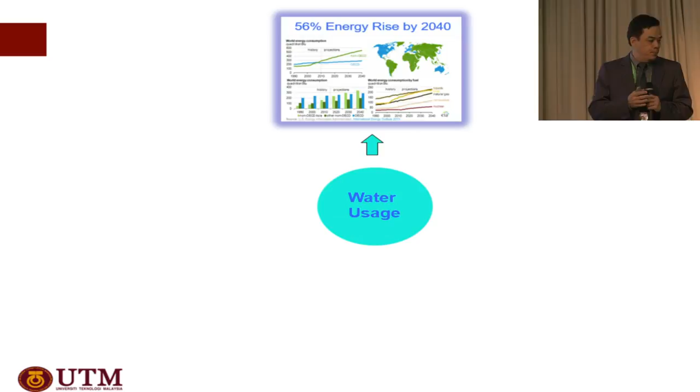Let's analyze water usage in a bit more detail. Water usage requires energy usage, as we know, and sometimes a significant amount of energy use. Let's try to analyze why water and energy are so closely related, from this water value chain that many of us are quite familiar with.

Water comes from water sources, is conveyed through a water treatment center, and then distributed to consumers. After that, it's treated as wastewater. Wastewater is treated after use in sewage treatment, and then discharged according to standards required by every country before water sources are generated again. So you will see that every stage in water utilization requires none other than energy.

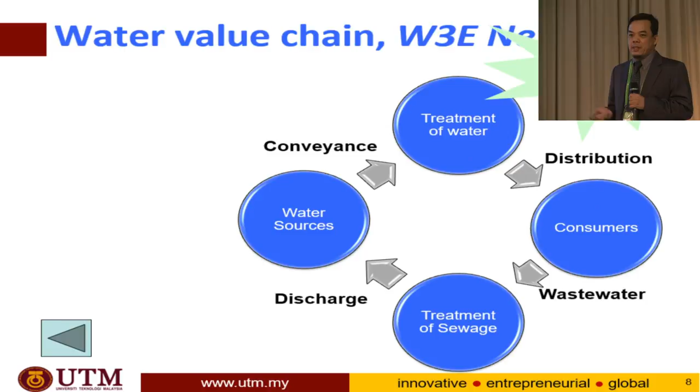Every stage requires none other than energy. It means that other than using water and paying for water, we also have to pay for energy throughout the value chain of water. So I call this the W3E nexus. What is W3E nexus?

W3E nexus means that water is closely linked to energy consumption, linked to environmental consumption, and also linked to economics, or linked to costs, because water requires energy and you pay for the energy cost throughout the value chain of water. You pay for the raw water bill itself, and you pay for the chemicals to treat the water, as well as capital costs for water. The bigger the usage of water, the more impact you have on the W3Es.

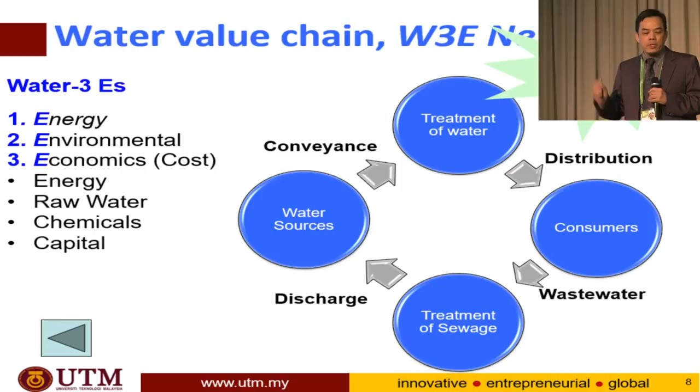Water, energy, environmental, and economics. So far, people have known that there is a close nexus between water and energy, but they have not put it in this form. Let's go back to the figure that I had before.

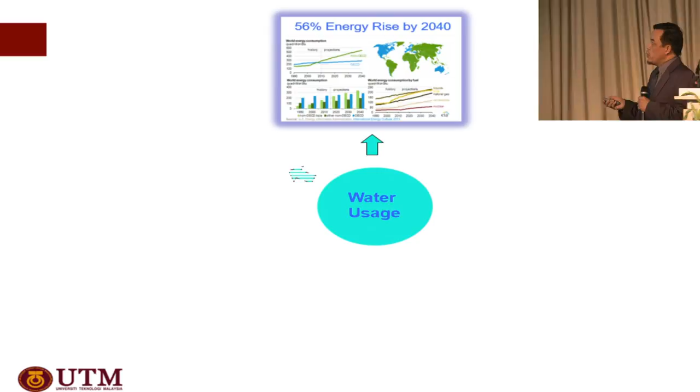So we know that water usage is closely linked to energy usage, and water usage is also closely linked to pollution, because as we use water, we tend to pollute, to varying degrees. We also pollute not just water, but also the environment, generating gaseous emissions.

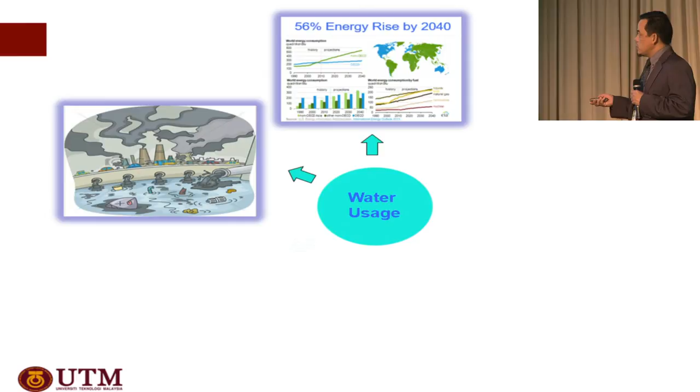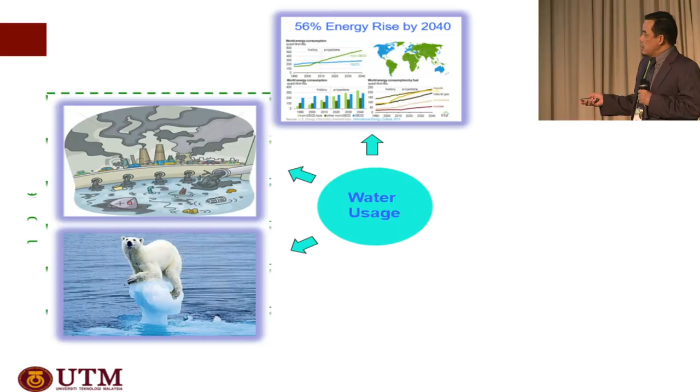Why? Because as you use energy, you also emit gaseous pollutants. And as I mentioned, water is also a cause of global warming and climate change, because we pollute water as well as the environment, generating gaseous pollutants. So this is the environment nexus.

And on top of that, we also know these are the causes of water shortage. All three nexuses are the causes of water shortage, because energy usage, on the other hand, requires a significant amount of water.

When we produce steam, we need water. When we produce renewable energy, we also need water for cooling, for example. So energy usage is a big contributor to water shortage. So does pollution, because when you pollute the environment, we also have less quality water. In the end, that nexus is actually reversible, typically.

There is also the link between water shortage and climate change. Recently in Malaysia we had a very big flood, which you may have caught in the news. Because of the flood, all the people affected had problems accessing quality water, and that caused water shortage. Even flood disaster linked to climate change caused water shortage, and you can be assured drought is also one problem of climate change that causes water shortage.

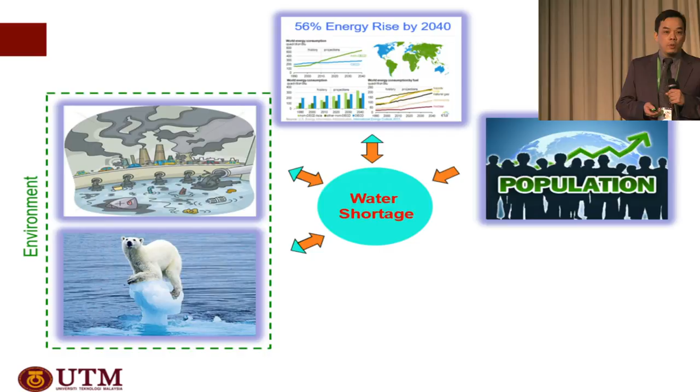What other things cause water shortage is actually what we already know: population increase, demand for water has increased over the years, and industry, including agriculture, may be the highest demander for water. In the end, all these contribute to a major economic risk in the world. The United Nations Environmental Program has estimated about 63% of all risks are associated with water.

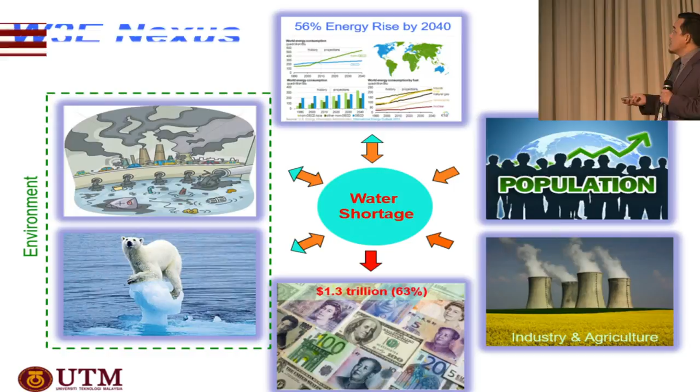That's why water is the biggest global risk, to answer the first shocking news. So that's what I call the W3E nexus. The last E is the economics nexus. This is a big risk, a major risk.

By 2030, it is estimated that because of water shortage, the world is projected to face a 40% global water deficit under the business-as-usual climate scenario. This was basically reported very recently, in 2015.

So the question is, what are we going to do here? We will be sharing some experiences of what we have been doing. You may share your experiences too, because ours is just one of many experiences people have had. This is the topic I'm going to talk about today: the W3E Nexus, achieving water sustainability through what I'd like to differentiate as piecemeal versus holistic strategy, the systems approach. I'll go through this quickly, as I don't think I have time to go through the details, but I need to share these things.

If time permits, I will share a video, about 2 minutes, of what we have done at UTM, for example, to raise awareness among students on water sustainability. Some take-home messages after that.

Back to the water value chain. We can divide the water value chain into two sides: one is the supply side, the other is the demand side. We also remember we have 3 E's to worry about: water, energy, environment, and economics. When we propose solutions, it's better that we subject every solution to this W3E nexus.

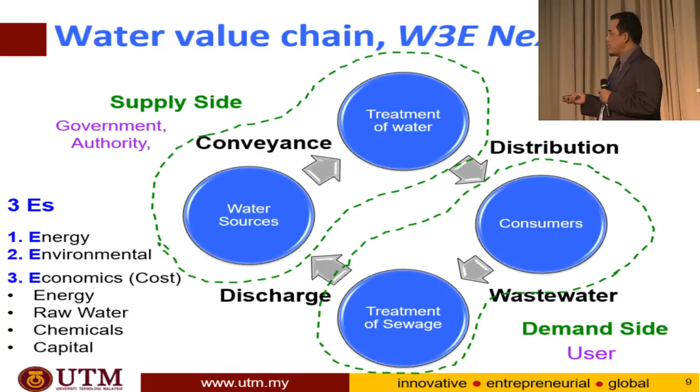The user can take the form of industry, public and commercial facilities, as well as domestic and individual users. This includes agriculture when we talk about industry. We can change behavior, related to both the supply side and the demand side, where government can enact policy, give motivation and regulations to encourage people to make wise use of water. What I'm going to focus on more is engineering sustainable water systems.

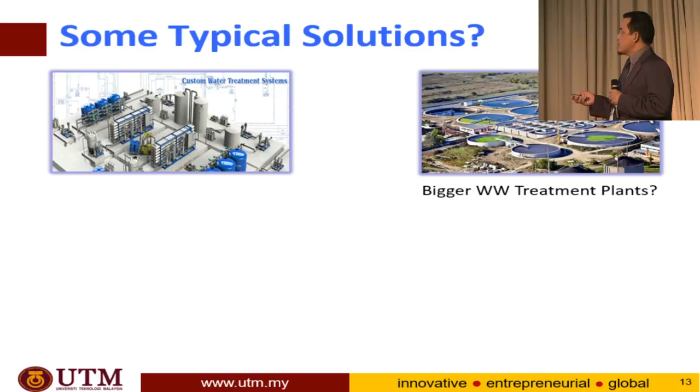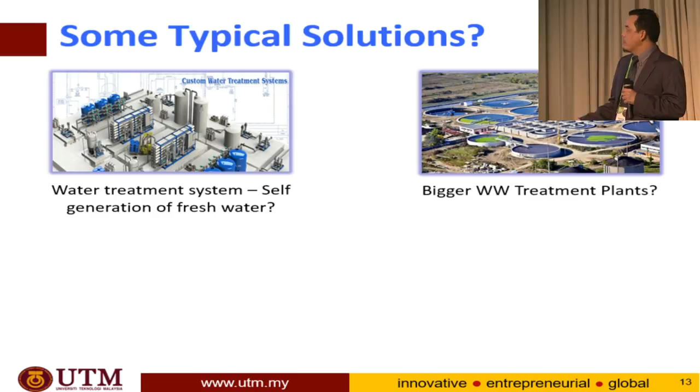So these are some of the typical solutions we can highlight. For example, people talk a lot about treating water—treat and treat and treat water. For us this is very good, but it's end-of-pipe treatment. So do we build bigger wastewater treatment plants? Or do we treat the wastewater ourselves, as some countries do, where even black water is treated until it becomes potable water that you can drink? Or do we do rainwater harvesting, as some people propose?

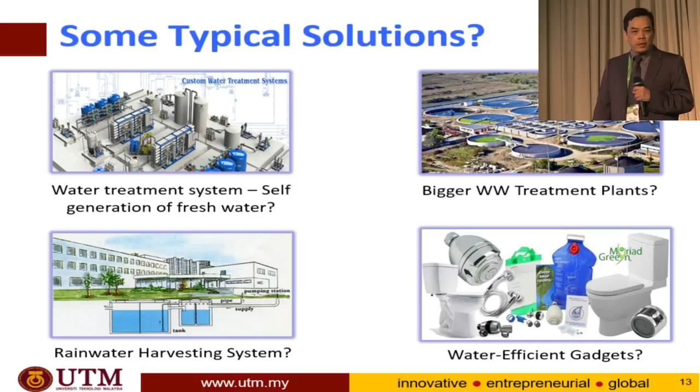Some people are very passionate about rainwater harvesting for good reason. Others suggest water efficient facilities. These are all excellent solutions, but the problem is we want to see how to put these things together. Are there things we can do that are connected to one another? What are the greenest and holistic ways to achieve water sustainability?

First and foremost, can we think about not using water in the first place? Secondly, if we cannot avoid using water, can we use water less? And finally, there are many water using options. Can we take the best mix of these options, not just pick one at a time as convenient because a supplier suggests it?

What are the holistic ways to put all these things together? These are what we want to propose, and maybe you can counter-suggest better ideas to be greener and more holistic in reducing water. But at all times, try to apply the W3E. For example, if people suggest to use, reuse, and recycle, does it conflict with the W3E scenario? Does it use significant energy? Does it pollute the environment? What about the economics? W3E always comes into the picture.

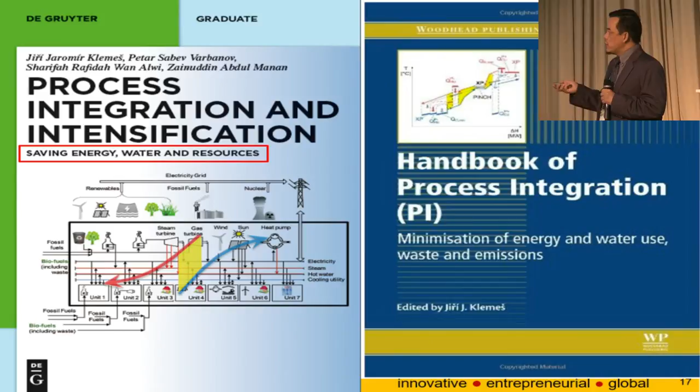in Mimos Semiconductor in Malaysia. And this is some of the things we have documented. The chairperson over there is basically the editor of the book and first author of the book we have done together, and we contributed the chapters on water minimization.

Let's see the water management hierarchy which we have introduced and deliberated, as well as explained in many of the publications we have shown. First, let us try to reuse water as much as possible. When you have a water source, there is no sense in eliminating the source first, even though elimination seems like a good option.

There is no sense in doing that because what you have created cannot be destroyed. If you have created wasted water, the most logical thing to do is try to recycle the water. There are ways to do it, but it's more difficult, and under W3E it may be more difficult still. Then the next level of the hierarchy, once you have exhausted the options for reusing the available source...

then you try to do source and demand manipulation. Try to manipulate or eliminate the source, or eliminate the demand, reduce the source or reduce the demand once you have done the reuse. Then try to think about outsourcing the water, meaning trying to get river water, snow water, or whatever water is available in the environment that can be used directly.

And then, for the sources of water you have, try to regenerate and reuse them. Finally, wastewater treatment is good, but that is the last option, the end of pipe, before we discharge to the environment. So those are the things we propose for us to do.

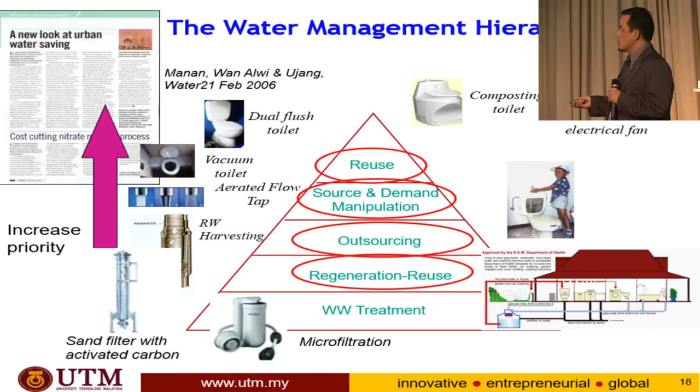What has been done so far? I'm going to get more technical, allow me to do so here, but not for long. Summary of the state of the art on water minimization, on engineering water sustainability, and I'm going to focus my attention on water network design and optimization. What has been done so far in water minimization research revolves around so many authors that it would take pages to highlight them all, but the key areas are network design, minimum water targeting, and largely focusing on the 3 R's: reuse, recycle, and regenerate.

A very small portion, or almost none, focuses on the hierarchy: elimination, source and demand manipulation, reuse, regenerate, and recycle. We have seen significant work done, and the ones we will highlight here are process changes, water network, minimum water network, and holistic water minimization options, along with use of impure water feed, outsourcing, and cost estimation.

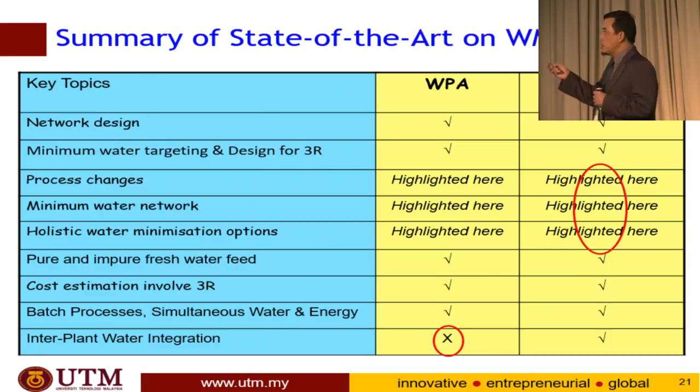Involving the 3R, batch processes, simultaneous and interplant water integration has been extensively done by so many people. They have contributed so much, and such great work has been highlighted, done along the line of graphical and insight-based approach, algebraic approach, as well as mathematical programming approach. We have done them as well.

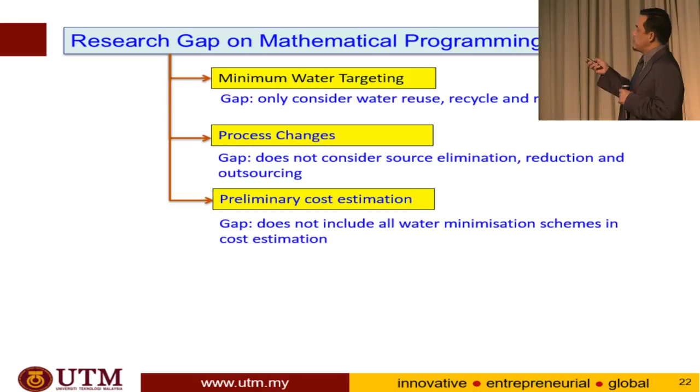We realize that the part we are going to highlight here is the most glaring gap available on process changes, minimum water targeting, and holistic water minimization. We will highlight what we have done in terms of rigorous solution on mathematical programming, very quickly.

So what we are trying to solve is a set of industry activities, or even domestic and public facilities. You will find various sources and demands, water sources and water demands, which we call global water operations or activities. It is desired for us to design an optimal and holistic water network to get the E for economics, the cost, maximum net annual savings, considering all water management hierarchy, and payback period for retrofit using mathematical programming approach. This is what we have done before.

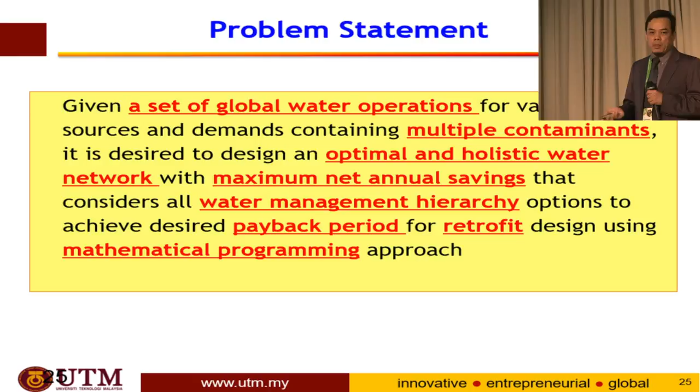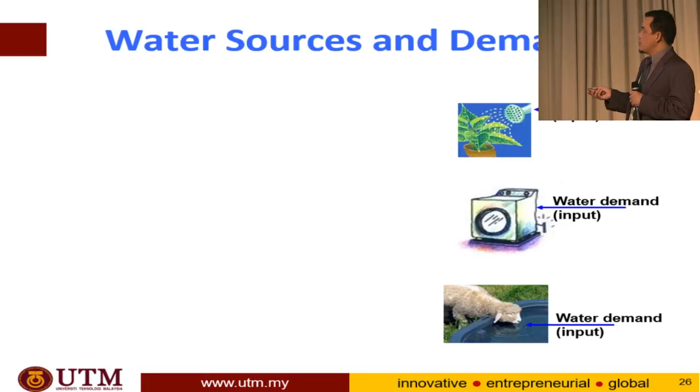Before we go on, let me remind us that when we talk about water demand, it is water input into an activity, not necessarily a process - it can be a very simple household activity. We can talk about water source as water output from any type of activity, a process or an activity that a person does.

So the methodology we go through is to collect the water activities and look at all possibilities to reuse, recycle, reduce, or eliminate water, and then do mathematical formulation and the regular computer-aided approach. This is what we have done, and what we do is have a superstructure of network.

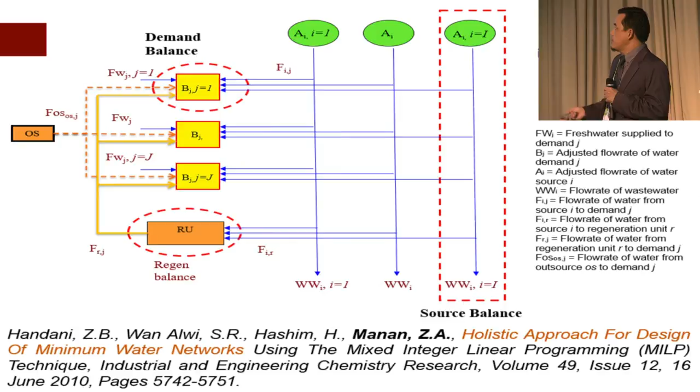B is the demands. We have to take into account water regeneration as well - water regeneration and reuse, and the possibility of using water from the environment, outsourcing water. Then finally we come up with what we call an MINLP program.

Because the constraint is nonlinear - you have a 6/10 costing factor that makes the equation nonlinear - we have a nonlinear problem. Basically, what we are taking into account is the saving from fresh water, saving from wastewater. Remember the W3E nexus: saving from chemicals, saving from energy, and that gives us a holistic approach, a holistic solution for water network.

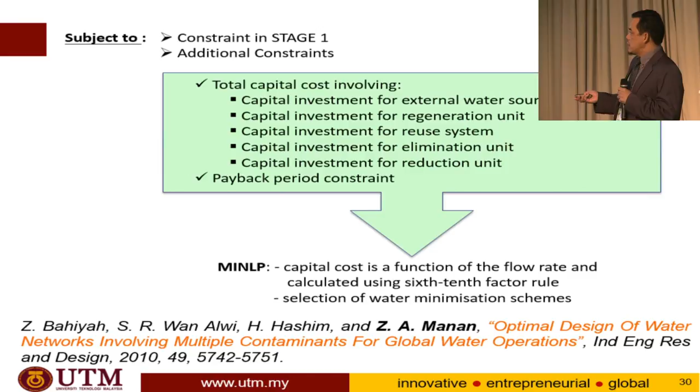And then we take into account the cost functions, which is a 6/10 cost function - this is a nonlinear cost function. Then we get the payback period to satisfy the last E, which is the economics.

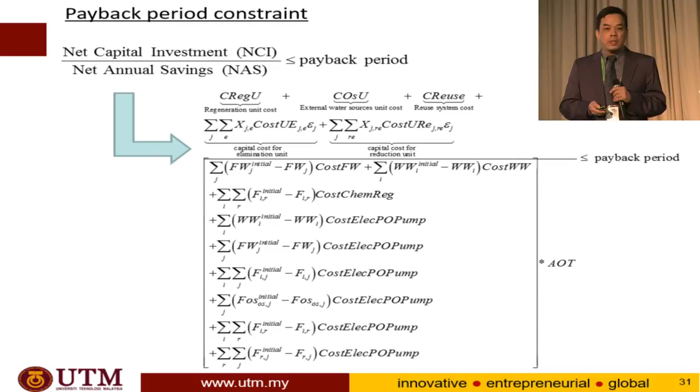Because the plant would not be too happy if you propose 100% saving, but it will take 20 years. So we have to toe the line of what the plant requires. For example, if they say 2 years, then we try to make sure it will be within a 2 year payback period, as the plant requires. So engineering water system holistically.

Then we have this reduction and elimination that is coupled with this previous formulation to take care of the elimination, reduction, and combined elimination and reduction solutions.

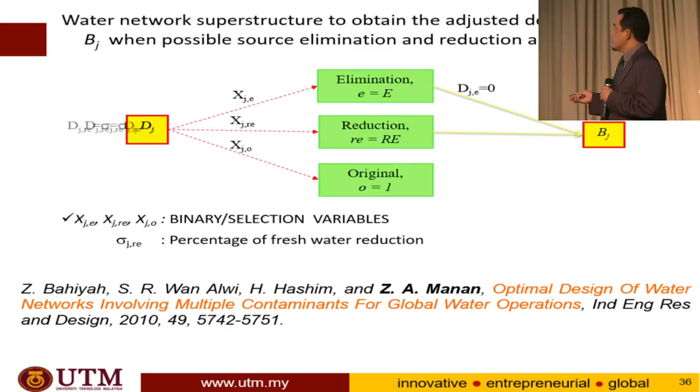So there are issues about this modeling. We have done it, but there are issues, and these are the feedback that industry gave to us - because they don't understand too much about it, they lack interaction, they don't know what is going on when we give them this mathematical formulation. They told that to us. Basically, we provide the solutions, but they cannot manage the complexity - it's too complex, they cannot utilize it too much.

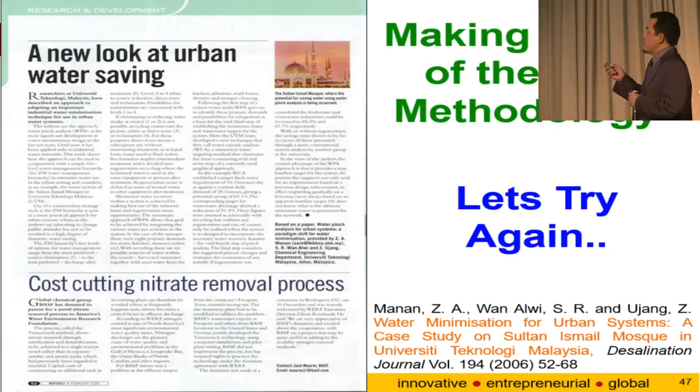So, do you have an alternative, so that we will be able to understand and make decisions together with you? Because of this, we try to make sense of the water minimization methodology and try again. First, let's go through the methodology we have proposed using the modeling approach and try to make sense out of it. Limiting water data extraction.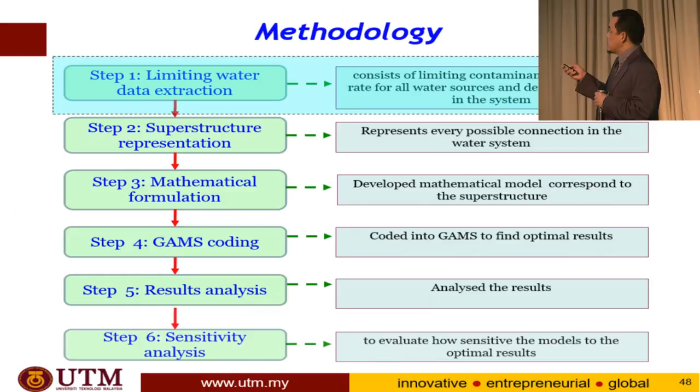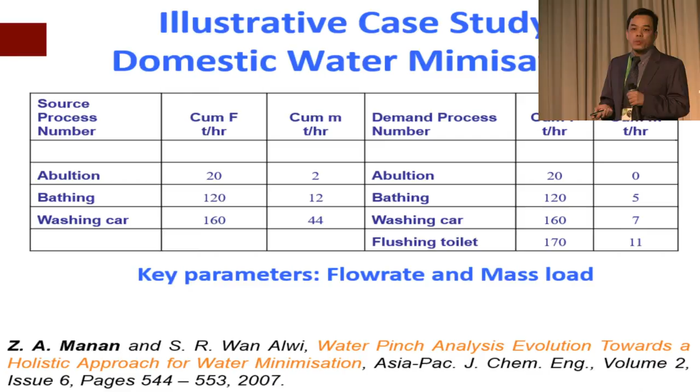This is basically, if you have a domestic water minimization activity, you just list down the water data. For example, in our case, we do prayers, ablution, bathing - and this is the concentration. The demand process for ablution, bathing, washing car, and so on has been listed. The key parameters involve flow rate and mass load - the mass load can be BOD, COD, and so forth. Then we go to the next step, which is superstructure.

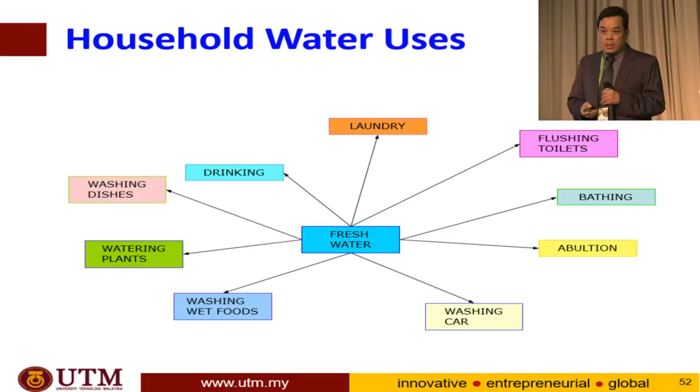This was formed into modeling, but we can do a down-to-earth water minimization case. For example, we have the fresh water, and we have many users of the fresh water. In Malaysia in particular, we do not recycle them at all. What we do is try to use everything using fresh water, and we audit the water in terms of liter and concentration.

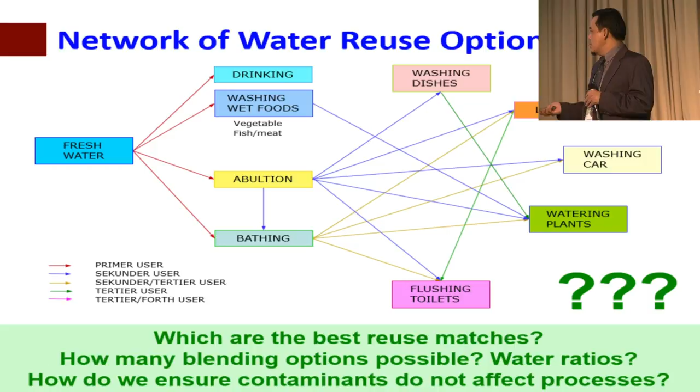Finally, we generate a superstructure. What we call a superstructure is actually all possibilities to recycle and reuse water. Can you do that? Which are the best reuse matches? We want to know how many blending options are possible, the water ratios, and how do we ensure contaminants do not affect the processes. That is the second stage: superstructure, and then mathematical formulation. This is the tough part for us to convince industry.

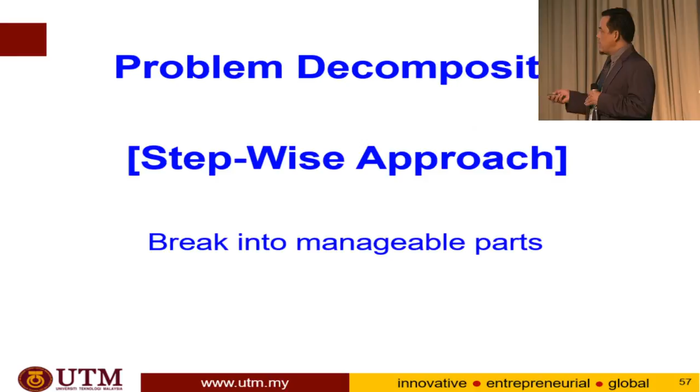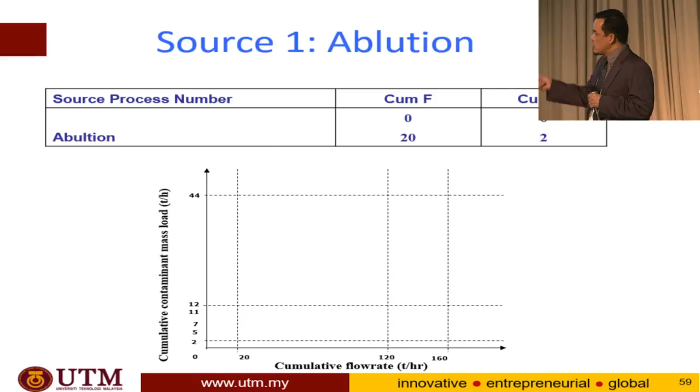So what we do is a stepwise approach. We decompose the problem into what we call targeting and design, breaking it into manageable parts so that the industry can understand better. We basically draw the source diagram. Water sources are represented in terms of cumulative mass load and cumulative flow rate. Each of them, we draw sequentially. This is the sources and the cumulative sources for each of the sources.

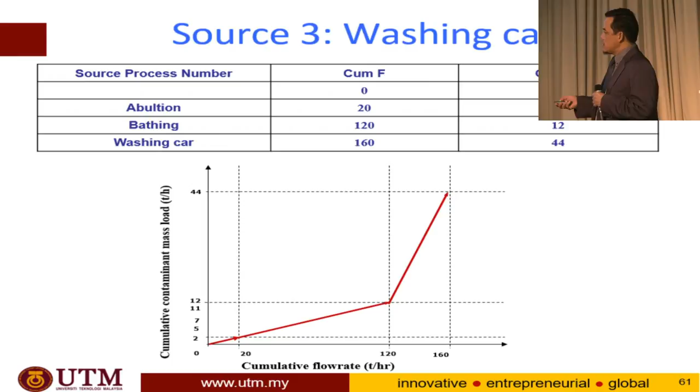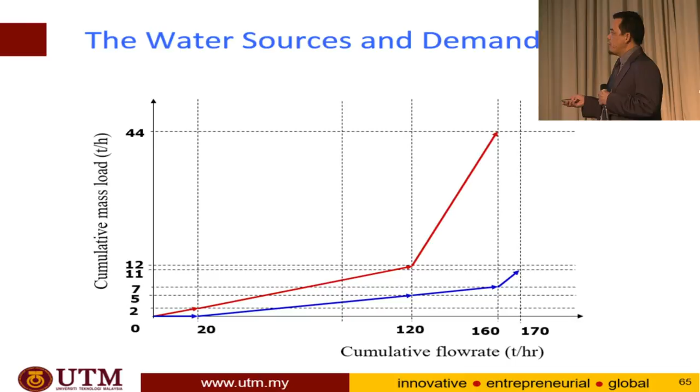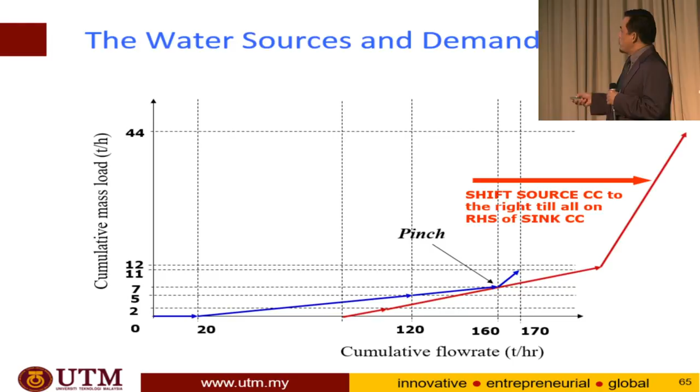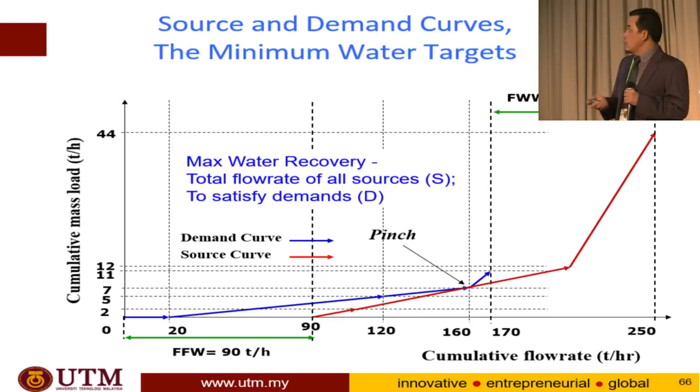And then we also draw, in the same manner, the demands. Finally, what we can do is look at all possibilities to recycle water. When there is overlap between the source and demand, it means you can reuse that water source to satisfy the water demand. When there is no overlap, that represents the minimum amount of fresh water you have to use and the minimum amount of wastewater you will generate. So this is just the targeting part, to show us the benchmark usage, the minimum amount of water we will use in terms of fresh water as well as wastewater.

Better and greener ways not to use water, use less water, remember, to satisfy the demand. Can we do something else to do the problem holistically? So we want to know the best mix option, not just to use and use less. Why not try to directly reuse? We know the option of direct reuse.

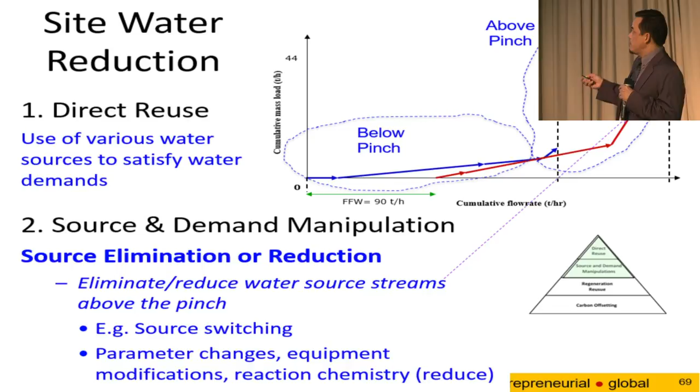Whenever there is overlap between the red and the blue curve, it means we can reuse water, subject to the contaminant concentration. Then we have wastewater generation and freshwater generation. If you have overshoot of the source stream, this is what we call the pinch. This is the pinch point. It means that is the maximum amount of water you can reuse. The pinch is basically the maximum that you can use the water for, reuse the water. That is the pinch, that is the maximum. You cannot go further than that with the given conditions.

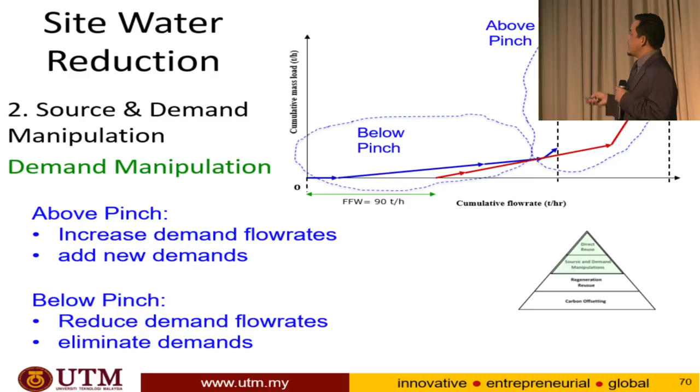So above the pinch, you can try to find out if you can reduce this overshoot of the source of water. You can also think about how to lengthen the curve, because you want to make sure the blue part and the red part overlap as much as possible. Look at the blue curve there: this is a demand, this is a source, and the source is much more than the demand. Why not try to lengthen the blue curve such that you have more demand and can recycle or reuse more water.

If this is the amount of wastewater you generate, can you think about how to take just this portion and treat it so it can be recycled to that portion, giving more overlap? So integrate with demand below the pinch, which will reduce the wastewater and reduce fresh water use. If we can do that, on the third level, regenerate and reuse, we would be able to save more water. For example, this overshoot part is the source of wastewater. Treat it, find the most cost-effective regeneration approach, and instead of fresh water, use the regenerated water. That way you don't have to treat all of it, just the right amount, and give it to replace the fresh water.

So that way you can play around, and the industry is very happy about being able to understand the numbers and everything.

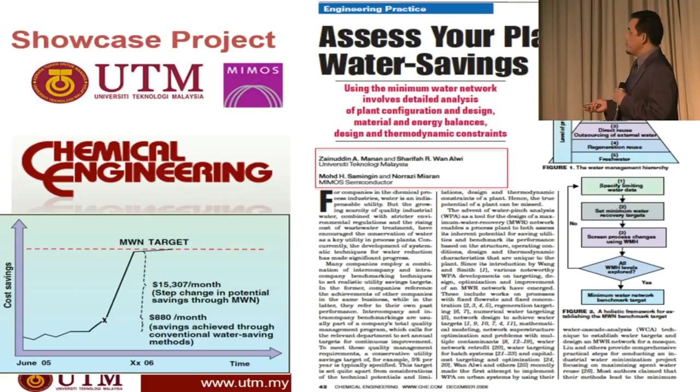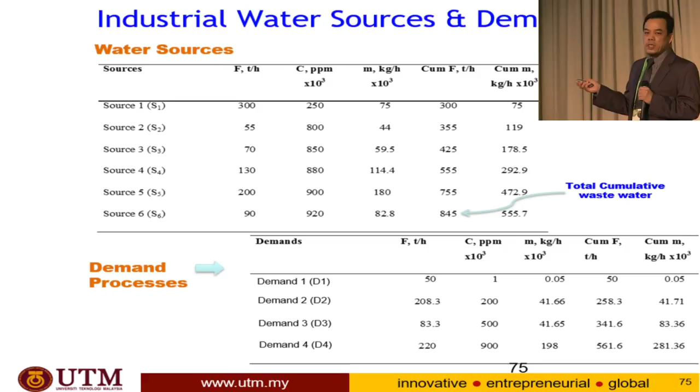And if you manage to reduce that, you would be able to even go for zero discharge, if the plant wants to go for zero discharge cost-effectively. So let's try to look at this first overshoot that you have. Overshoot means there is no overlap between the demand D and the source.

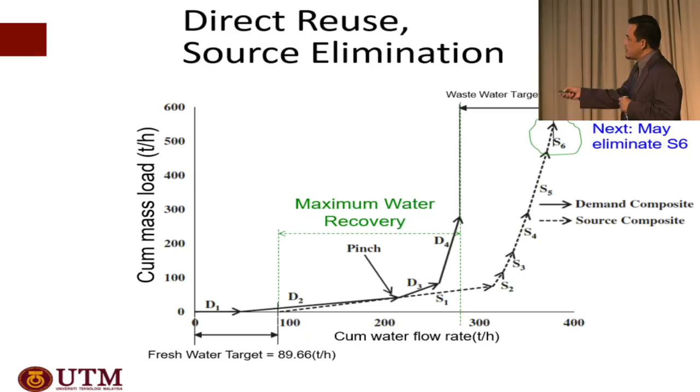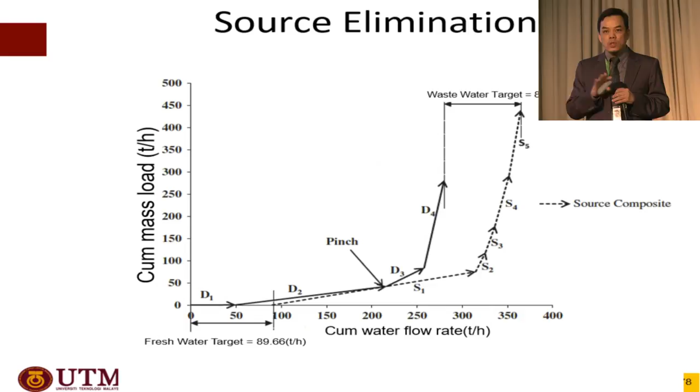First overshoot, eliminate S6, for example. Try to eliminate S6 by, for example, source switching. Can you use a fin fan cooler instead of a water cooler? It's just an example, not necessarily that you apply that. So eliminate the use of S6, and you will see that from 99 point something, it reduces to 84.77 if you manage to do that, and wastewater reduced by 14.5%.

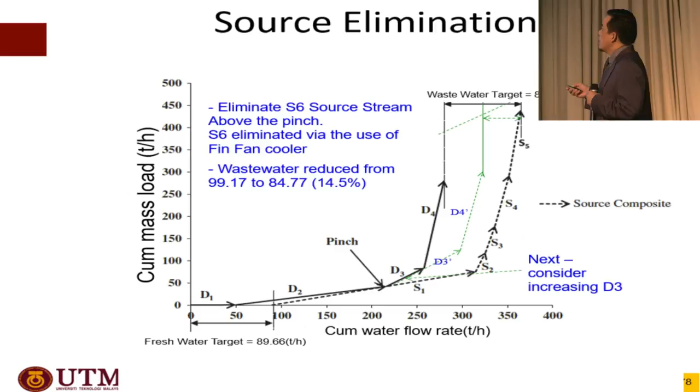Next, consider increasing D3, because we want to have as much overlap between the demand as well as the source. So increase demand 3, we may be able to try to increase it, but remember, subject to W3E. If you manage to do that, you will significantly reduce that part of the water source that is overshooting, and you will see that many of the sources have been catered for by this new demand that's been increased. Demand in stream above the pinch increased, giving a further reduction of 61.3%.

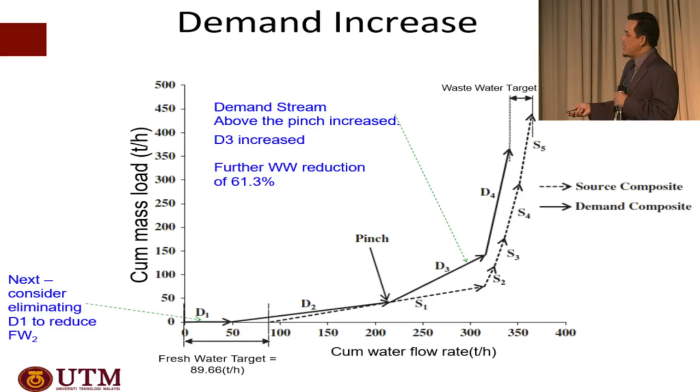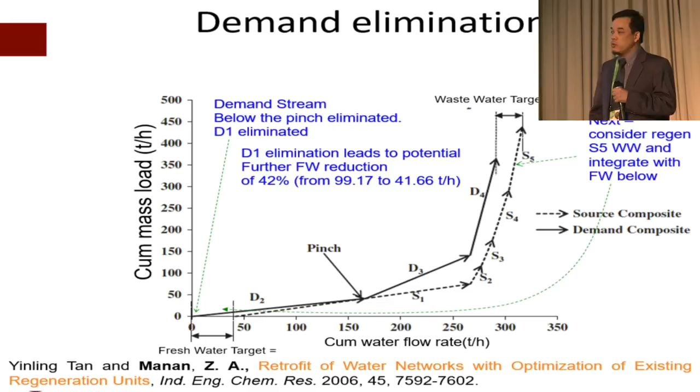Next, consider eliminating this overshoot of the demand, because there is no source there, you use freshwater, so try to think about reducing demand. You can also think about regenerating S5, for example, because there is still some overshoot, and send it to the process below the pinch, because the process demands water. And finally, you will see that the freshwater target becomes 29.12 t/h.

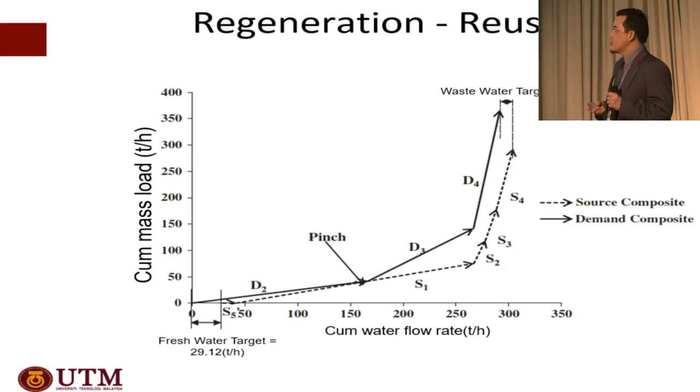We are not saying that this is implementable, that this is definitely what you want to do. No, not necessarily the case. But you have a tool to evaluate, that's what we're saying. If you want to evaluate it and industry wants to use it, implement it, by all means implement it. If you cannot implement it, don't implement it. So we are not saying force anything down anybody's throat that you have to implement these things. So regeneration leads to reduction, and these are the potential, not necessarily implementable, but you have to go through the stages of evaluation and then implementation.

So these are the series of stages that we have gone through: network design and allocation, and finally the final design.

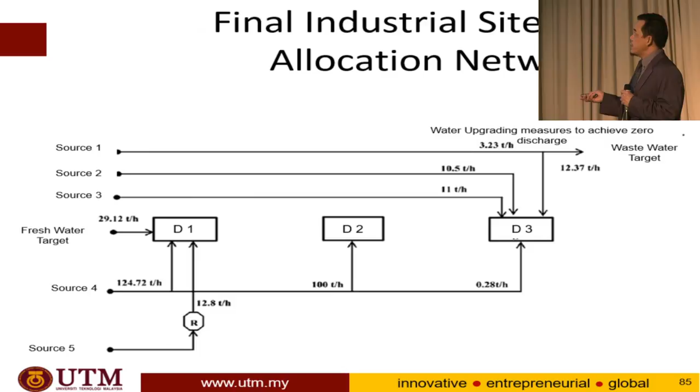Before, this is maximum water recovery, the typical solution people use: reuse, and so on. We also want to know water-wise or dollar-wise. We have also an approach where, for example, if we use reuse only, reuse plus eliminate, this is the investment, this is the annual savings. And then if you use external outsourcing, for example, this is the curve, and if you add with regeneration, the curve becomes that one.

You can decide immediately which particular option is the limiting part in terms of cost effectiveness, because you know that basically if you try to reduce any of the gradient there, you would be able to reduce the total cost. Say, for example, the total cost now, investment versus annual saving, the payback period is going to be very high, because the external water usage is the steepest gradient in terms of investment. What you need to do is just try to cut the steepest gradient.

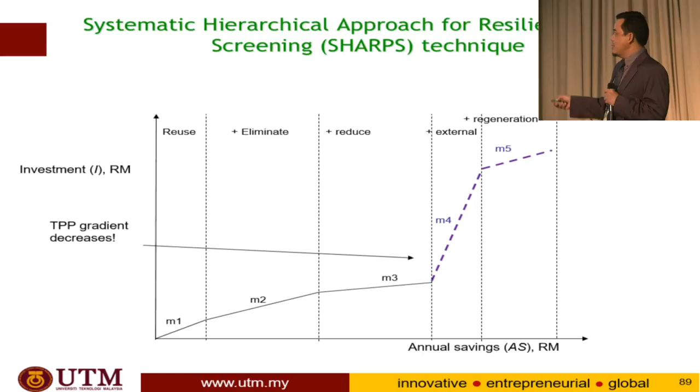How do you do that? The first strategy is to try to substitute — for example, if a tank uses a stainless steel tank, or maybe a steel tank, sometimes you use it because you really need to, but for a steel tank, for example, can we try to substitute it with cheaper types of material tanks?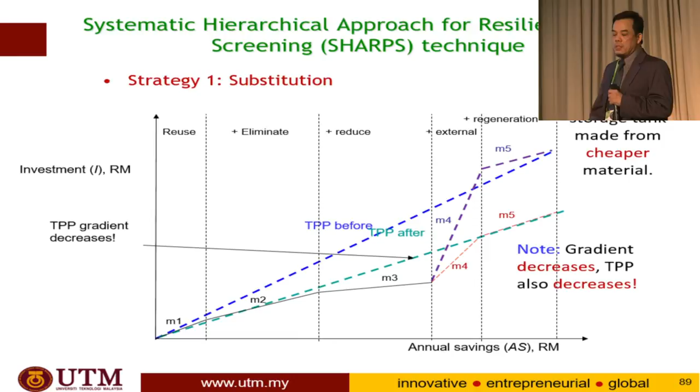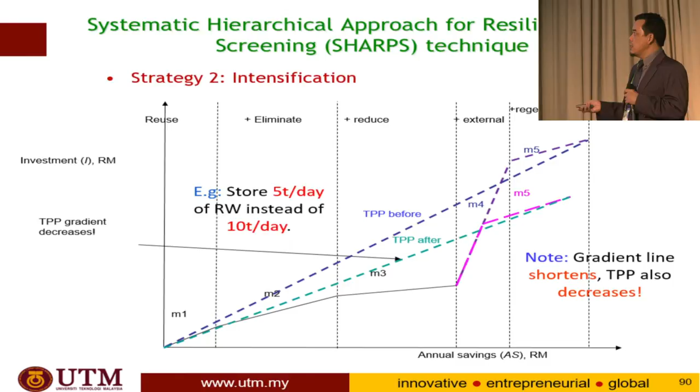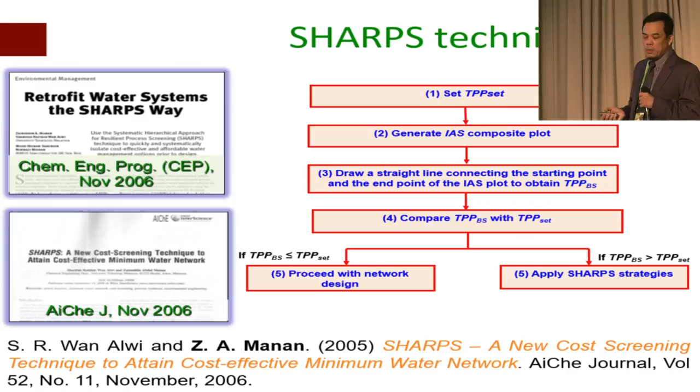So M4 becomes lower, and it will be able to satisfy the investment required by processors. The second strategy is intensification. Still, M4 is basically the highest gradient. What we want to do now is reduce the size of M4, in terms of storage tank, like rainwater harvesting. If the plant says the payback period of 10 years is too long, we suggest half the tank size. Instead of maximum rainwater harvesting, just half, and you'll see the external source becomes lower and meets the requirement of the plant. That's intensification. This is what we call the systematic hierarchical approach for resilient process screening, which we put into SHARPS.

There are limitations of the graphical approach. We tend to get excited about it, but there are many limitations. First is multiple contaminants. We have done the industrial part, and when you have multiple contaminants and need the graphical approach, you do localized integration with similar types of processes. Similar processes allow you to recycle similar streams or wastewater through localized integration. But if you use site-wide integration, you suffer because you won't get the optimal result, since there are so many contaminants. Localized integration isn't necessarily guaranteed to work, but it's one solution.

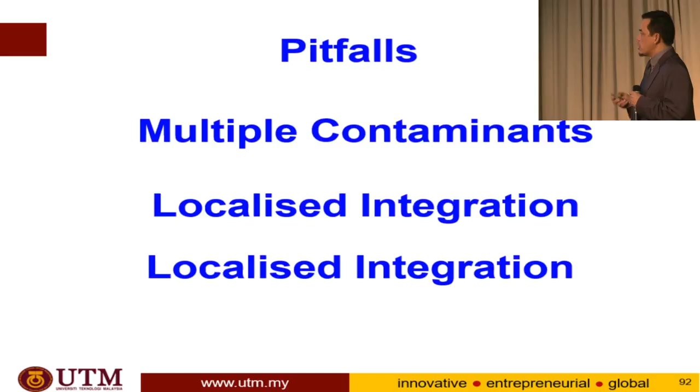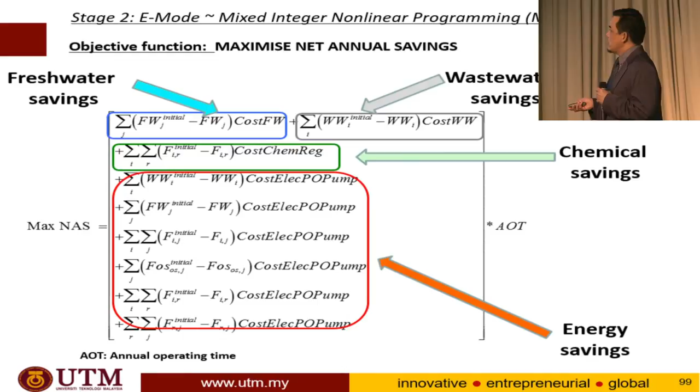It seems like cut and paste, but the other approach is reconciling, an iterative approach, contaminant by contaminant analysis. Localize, reconcile, and iterate with other contaminants—this is for the graphical approach. But once we've convinced industry that this is the way to go, and these are solutions for them to adapt, we go back to the rigorous solutions for multiple contaminants. Because they understand it by then, and they're very much into the solution, we go back to the multiple contaminants approach.

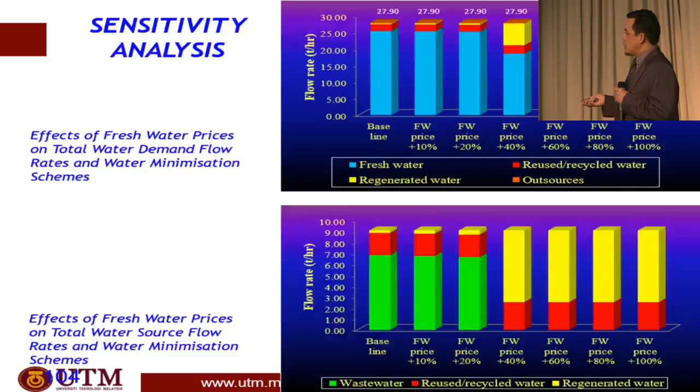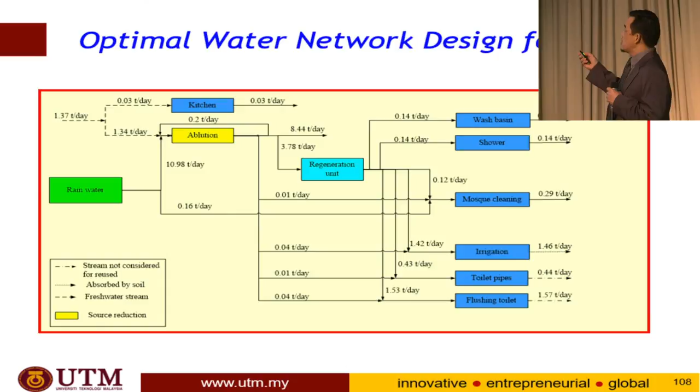So these are some of the things we've done: optimal water network design, sensitivity analysis using a mathematical approach, and public as well as commercial facilities. This is a commercial facility, and this is a mosque in UTM that we've done—optimal water network design for Sultan Ismail Mosque in UTM. These are the payback periods and results. If you're interested, I can go through them. Here are highlights of other results.

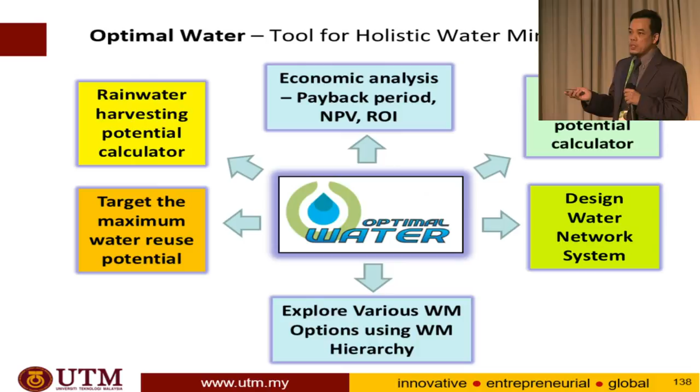These are some of the highlights we've done with industry, and the software we developed. This shows that industry can appreciate the technique, but they don't want to do calculations or use Excel and so on, so we propose they use the software to assist them in making decisions.

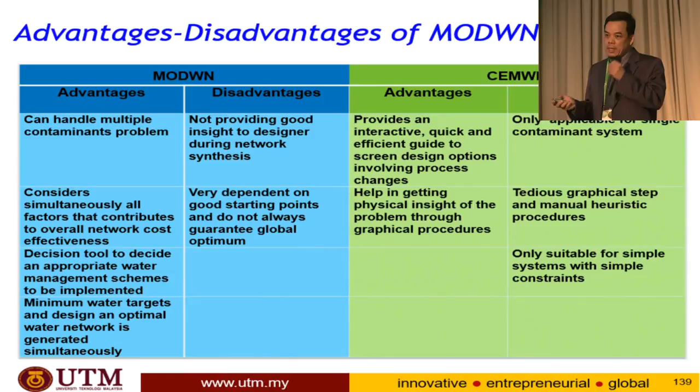In a nutshell, there are advantages and disadvantages of many techniques, as with any other technique. The multiple contaminant approach of mathematical modeling is powerful—it addresses complexity, but lacks the insight and interaction industry wants. On the other hand, the graphical approach is interactive, gives physical insights, is easier to understand, and lets people participate, but it can be tedious and only suitable for simpler systems—often only applicable to single contaminants, though we can address multiple contaminants in some cases.

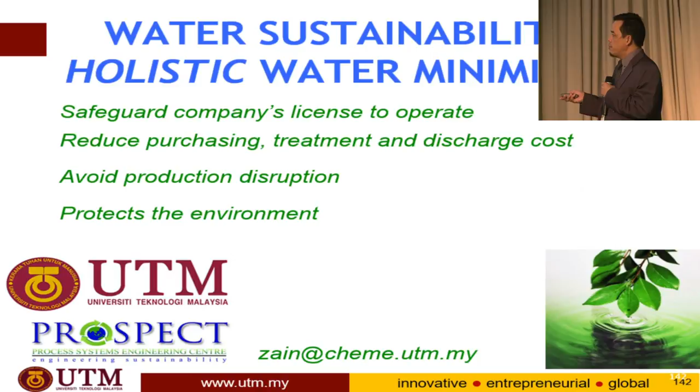So why do we need to engineer water sustainability? To safeguard companies' license to operate. Among the pains of industry is that they need a license to operate—if they pollute, they won't have one. This is powerful regulation, present all over the world; companies need to abide by it. It will reduce purchasing, treatment, and discharge costs, the second E—economics. It will avoid production disruption cost, and protect the environment, the third E. So W3E is there for us to abide by. If I have time I can show this, but if time is limited, we'll move on.

Before that, let me give the key take-home messages: water shortage is one of the world's biggest risks.

Engineer water sustainability using holistic water minimization, subject to the W3E, and apply the winning strategy of blending power with insights.

There is no competition whatsoever for us, it is actually cooperation. I would like to acknowledge the cooperation of those who have contributed, significantly the Center for Process Integration and Intensification from University of Pannonia, and the Ministry of Higher Education Malaysia, and a huge thank you to SDEWES and congratulations in particular to the team who organized the 10th conference, who have a very big vision in mind to make a difference to the world.